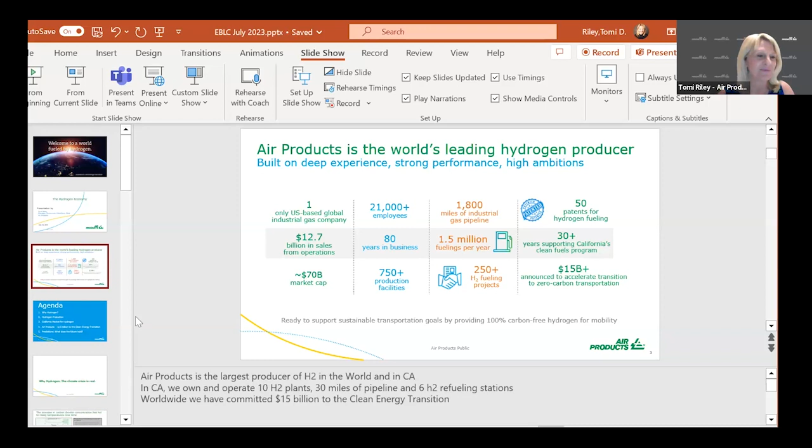So why hydrogen is what I'd like to talk about. I was asked specifically to talk a little bit about hydrogen production. I'll talk about the California market for hydrogen, another quick commercial about Air Products, and then briefly some predictions about the future.

So why hydrogen? Really, the climate crisis is real, and for the purposes of this presentation, we will need to assume that climate change is real. I think most of the folks in this group understand that CO2 concentrations have risen by more than 30% since the Industrial Revolution due to burning of fossil fuels and deforestation. You'll see in these two graphs that carbon dioxide concentrations have significantly increased, and along with that, temperatures.

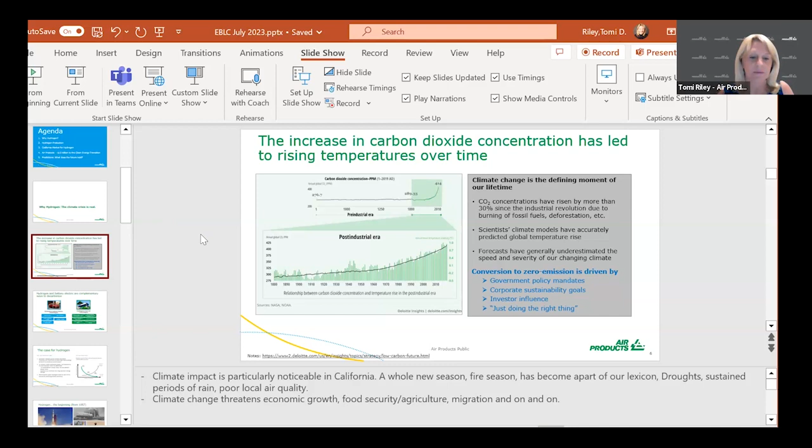And we're feeling that a little painfully right now. California is particularly noticeable for these effects. We have a whole new season. When I was living up in Grass Valley, I was painfully aware of the new season called fire season. It's become part of our lexicon - droughts, periods of rain, local air quality diminished. So climate change really threatens our economic growth, food security, agriculture, migration, and on and on.

Where do we see hydrogen? I want to first put it in context that we believe at Air Products that hydrogen and battery electric are complementary ways to decarbonize. We do see those as the two major energy sources in the future. But when will one be used over another? We believe hydrogen will be preferable when distance, weight, or higher temperatures are needed as an energy source.

We kind of predict that the battery electric will tend to be used for light duty cars, buses on shorter routes perhaps, light and medium duty trucks, light industries, heating and cooling. We see that's where electric will go.

But the piece of the pie that hydrogen will get, again focused on distance, weight, and higher temperatures - those buses on longer routes or more challenging routes, medium and heavy duty trucks. Port equipment is a big opportunity area for hydrogen, heavy industries.

And yes, as Gary mentioned, in the future, a little farther down the road, trains, planes, and ships will potentially be moving on hydrogen. Hydrogen's also a storage opportunity for renewable energy, so when the wind's not blowing and the sun's not shining, you might have backup hydrogen storage to feed the grid. I'll stop and do a quick caveat.

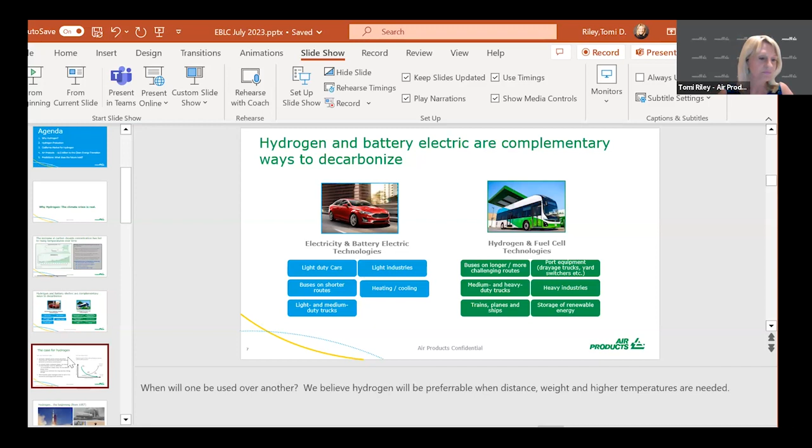The case for hydrogen, that's what we're talking about now. Why hydrogen? Well, industry and research indicates that the world lithium and cobalt resources will not be sufficient to fully electrify.

When you look at all of the sectors that will have to transition during the clean energy transition, if everything went to electric, our power grid would not be able to hold the demand. To achieve 100% renewable, seasonality of wind and solar must be addressed. Wind doesn't always blow, sun doesn't always shine, as I said, and batteries are inefficient for long duration energy storage. So world experts really do agree that hydrogen must be a part of the equation.

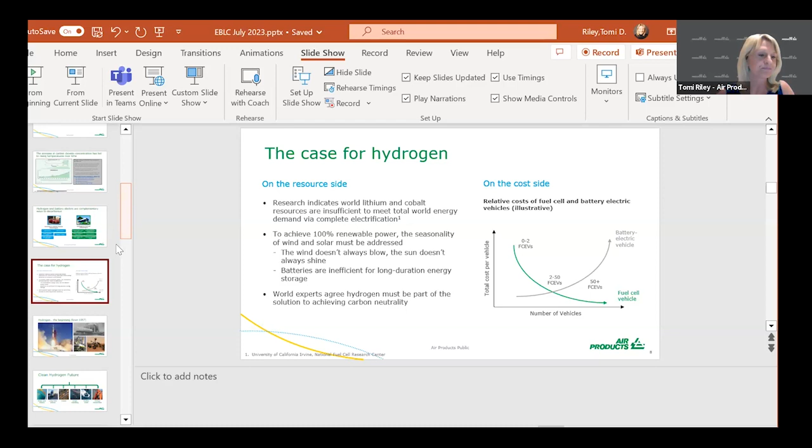So many people might remember the start of hydrogen with the NASA spacecraft. Air Products was providing hydrogen to NASA back then, and we are providing hydrogen to NASA today.

But hydrogen is the smallest element, number 1 on the periodic table. H2 is the lightest element in the atmosphere. And it's a very known quantity in terms of its use for ammonia fertilizer and other industrial works, most notably in California to help desulfurize gasoline.

I mentioned that we have about 10 hydrogen plants. We have 10 hydrogen plants in California. All but 2 of them are on site at refineries. So we work with the refineries to provide hydrogen, and that allows them to do the work to clean up gasoline. That was a big market for us with the cleaner burning gasolines. And so that's when we expanded to 10 hydrogen plants here in California.

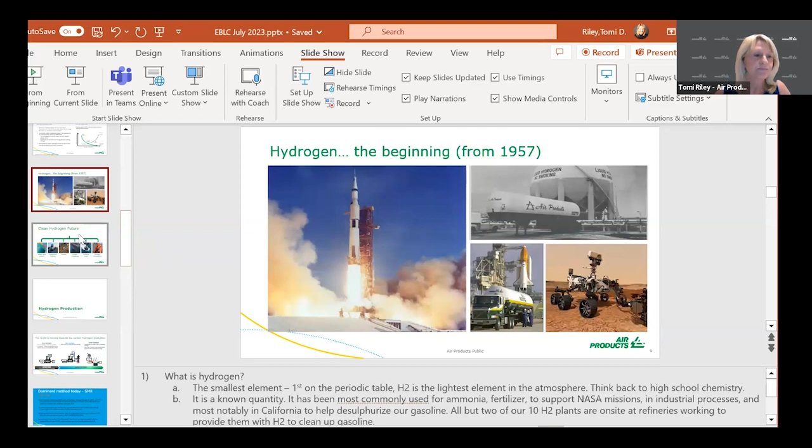Hydrogen future - I think I've kind of touched on this, but we really see a market for ports and port handling equipment. Again, weight comes into play and potentially the amount of uptime they need. Long haul trucks we see as the next segment.

If we're using hydrogen today in light duty cars and in buses, as we'll hear from one of our next speakers, long haul trucks is the next to convert, and that's a big market that we're looking at. Further down the line, we will have trains, ships, and planes, and possibly energy production. You can replace hydrogen with natural gas.

Replace natural gas with hydrogen, sorry. The caveat I will offer here is with ships, there's some folks that believe that a future bunkering fuel will be ammonia versus hydrogen. And for those of you who go back to your high school chemistry, ammonia is NH3, hydrogen's H2. Ammonia is very dense in hydrogen. So there's a guess that ships may be running on ammonia as their zero emissions fuel in the future.

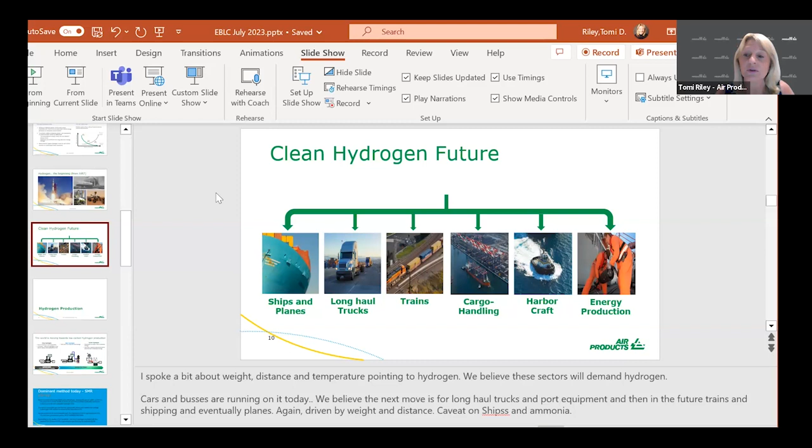Hydrogen production, that's what I was asked to cover this morning. I'm not sure how deep everybody is into hydrogen here, so I'm going to start from the beginning. The world is moving towards lower carbon hydrogen production.

Today you'll find that 95% of the hydrogen produced in the world and in California is steam methane reforming. That's called gray hydrogen. I'm using these colors really just for simplicity. In fact, my company is a little averse to using the colors because we think carbon intensity, real carbon intensity, is probably a better way to look at hydrogen. But for the purposes of today, and the reality is a lot of policymakers who are just still becoming familiar with hydrogen tend to use the color codes as well.

So gray hydrogen, the catch here is that you use natural gas and water to produce hydrogen. So while the fuel that comes out the other end is a zero emissions fuel for use in AC Transit buses or your Toyota Mirai that you may drive, the production process itself is not zero emissions. We use a fossil fuel, natural gas, to produce that hydrogen. So production is not zero emissions. End result, fuel is zero emissions.

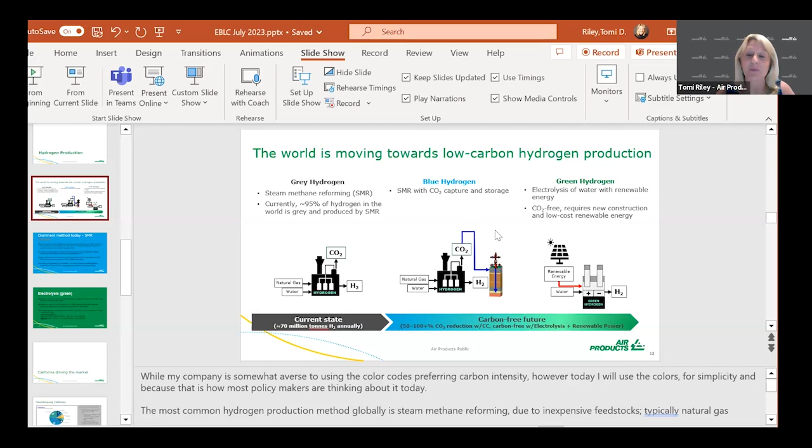So that's electrolysis of water with renewable energy. The renewable energy would be wind, solar, hydropower, whatever we'll classify as renewable to make that green hydrogen. It's CO2 free, but it does require new construction and reliable, most important, reliable, low cost renewable energy. So those are things that we're working on in this evolving market is to get there. So we'll see if we can get there by 2045 to get all the hydrogen produced in the state by 2045. I'm not sure if we will, but we're aiming to do that.

So again, gray is about 95% of what's produced in the world today. It is steam methane reforming, which uses natural gas and uses very high heats, as high as 2000 degrees Fahrenheit, in the presence of steam, and it results in the breakup of the methane molecules to form both carbon monoxide and hydrogen. Carbon monoxide gas can then be repassed over the steam, and we knock out a little bit more hydrogen from the process. So the upside of gray hydrogen is it's producing zero emissions fuel. Those cars running around on the freeway and those AC Transit buses delivering folks to their stop are zero emissions out the tailpipe. But the downside is the byproducts are CO2, and it's not yet carbon neutral.

It takes about 1 ton of hydrogen produced to also produce about 9 to 12 tons of CO2, a greenhouse gas that hopefully, as we move into the future, will be captured and not released into the environment. So the two most prominent forms of production are gray hydrogen today, and in the future, green hydrogen.

Electrolysis consists of using renewable electricity, typically from solar or wind. Hydropower might be an option, to split water into hydrogen and oxygen. It can be produced at a much lower temperature, less than 200 degrees Fahrenheit.

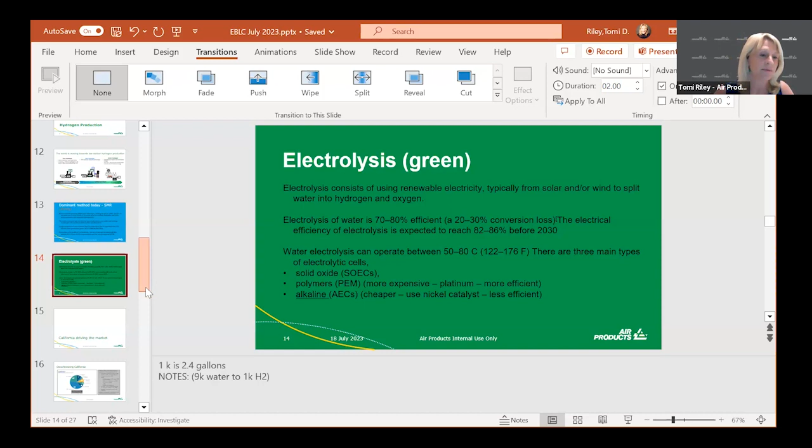So I'm going to move on a little bit to California. Driving the market, Air Products is all in California. And why is that? Let's take a quick step back and look at decarbonizing California. What is it going to take to get to 2045 or 2050 and be a fully green state?

Following that, trains, ships, and planes. Again, our target is transportation and industrial in terms of greening and decarbonizing. Everything else is 11% or less. So those are our two big targets for decarbonizing California.

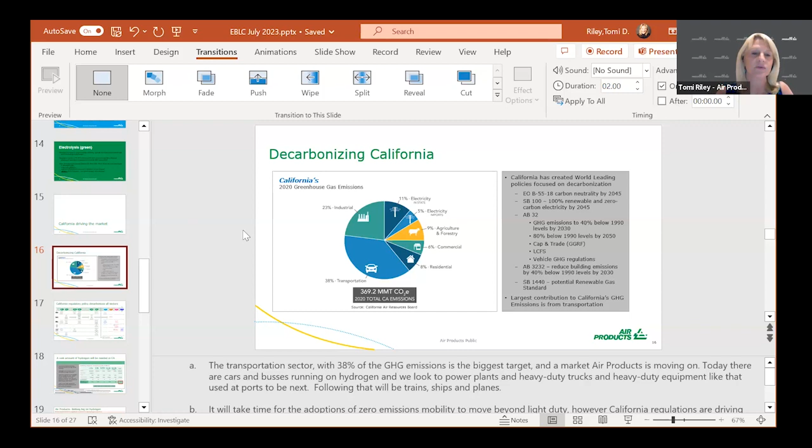As many of us know, the power grid is expected to be 100% zero carbon and renewable electricity by 2045. We'll see if we can get there. And carbon neutrality in the state by 2045. Statewide greenhouse gas emissions reduced by 80% below 1990 levels.

So California is driving this market. Many companies are saying it's too fast, too much, too fast. We're really enjoying the market and finding that it will create a great market for our product.

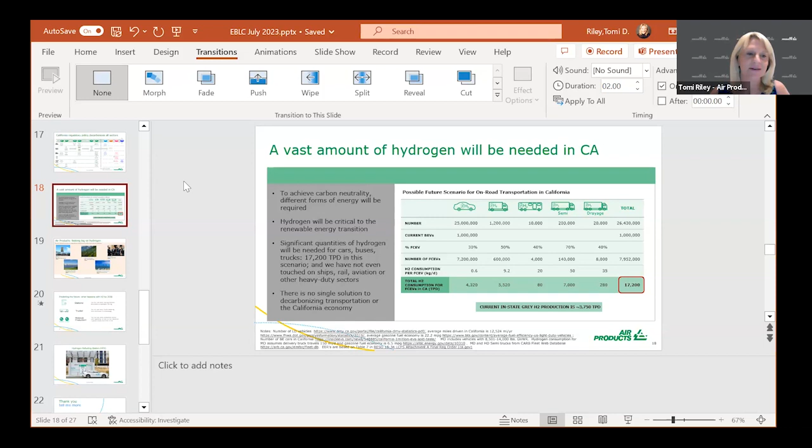So Air Products, the company I work for, is betting big on hydrogen. We've got green hydrogen production planned or underway in Arizona, New York, and Texas. And we're doing major blue hydrogen projects in Alberta, Canada, and Louisiana.

So while we have a long way to go to get to 17,000 tons per day of hydrogen in California, the effort to produce that low carbon hydrogen is underway. This is just what Air Products is doing.

And what's not shown here that I'll add is that we aspire to bring about $2 billion in new projects to California. We are a part of the ARCHES consortium, and if you're not familiar with ARCHES, it's a group that came together to submit a single application to the Department of Energy, who's offering up about $8 billion to incentivize hydrogen hubs across the US.

So we're one of a number of companies that came together to submit through the state of California. It's driven by the Office of the UC President, along with GoBiz in the state, to bring everyone together and submit one application so we weren't competing and dividing up our options in the state.

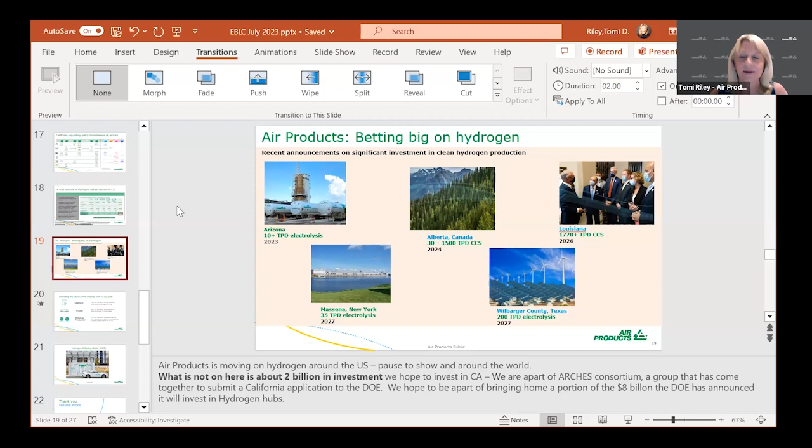We're excited to be part of that process, and again have about $2 billion we hope to spend in California to move the clean energy transition. And I'm wrapping up here, Lindsay.

So what's going to happen? By 2030, what do we expect to see? That's really not that far from now, 7 years.

You'll see a great deal more fueling stations dedicated to hydrogen. We own and operate 6. We have 25 that I know of, either in land development or permitting right now in the state. And that's just us. There's a lot of people out there doing the same thing we are. So you're going to see a whole lot more hydrogen refueling stations popping up.

Trucks, you'll see more fleets adopting zero emissions fuel cell technology. Air Products has a fleet of 2,000, and we are converting. We've put in an order to convert all of our 2,000 trucks to hydrogen. We've got 2 off the floor running around Southern California right now delivering hydrogen. The trucks are not being produced on an assembly line yet, so we're hoping that 2,000 truck order will start to push some of the companies to an assembly line so we can get more trucks out the door.

Running on zero emissions. And again, the molecule, you'll see more hydrogen produced locally and regionally. I'll offer that as we do today, we import a significant percentage of our energy, whether that's natural gas or other fuels. We'll continue to see that in the future. California just doesn't have enough land and water to produce all of the renewable electricity that we need to produce hydrogen.

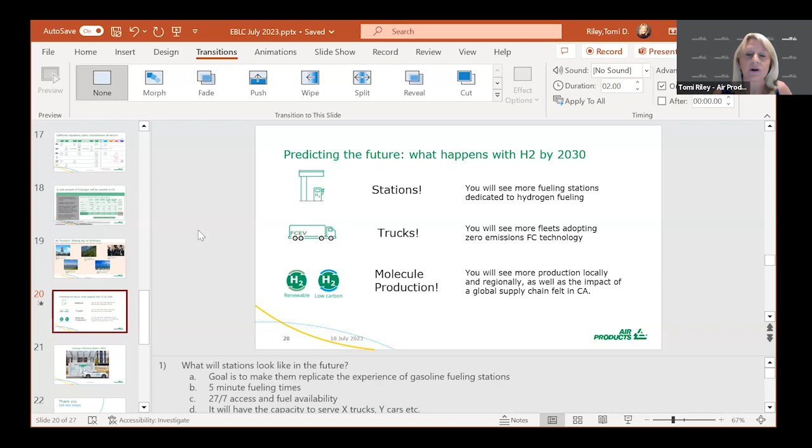And I'll end on that with a view of our hydrogen refueling station.

Lindsay, do you want, or Gary, do you want questions now or after?

Thank you, Tomi, and thank you for that wonderful presentation. I feel like I learned a lot in a short period of time, which is not always an easy goal to achieve. So thank you. I do think we'll do a few questions now, but there were a few that I think everyone might want to chime in on. So I might hold some of the questions until towards the end so that all of our presenters can chime in on them. But some of them were kind of Air Products specific, so I'm going to take a few minutes to ask those, if that's all right with you, Tomi.

Sure. One of them was, does Air Products produce any blue hydrogen today? We are in construction on blue hydrogen projects in Louisiana and Alberta. Startup has not happened yet.

And this is a question that I think might apply to all of our speakers, but I want to ask you, since you're coming from the perspective of a company who's contemplating this. That's the question from Bob Whitley, which is about water. Can the water supply be a lower quality than that for domestic drinking or agricultural demand? And what is the efficiency for conversion of water to hydrogen?

Yeah, they're working on that right now. I think that's a great question. We're excited that our plants, locally in Contra Costa, at Avon and the PBF refinery in Martinez, are close to some of the recycled water agencies. So, yes and no. Is it happening today? No, but I will offer that our gray hydrogen plant located down in Wilmington, California has signed a commitment with the Department of Water and Power in Los Angeles to convert that hydrogen plant to purely using recycled water. So while it's not happening today, I think it's in the near future.

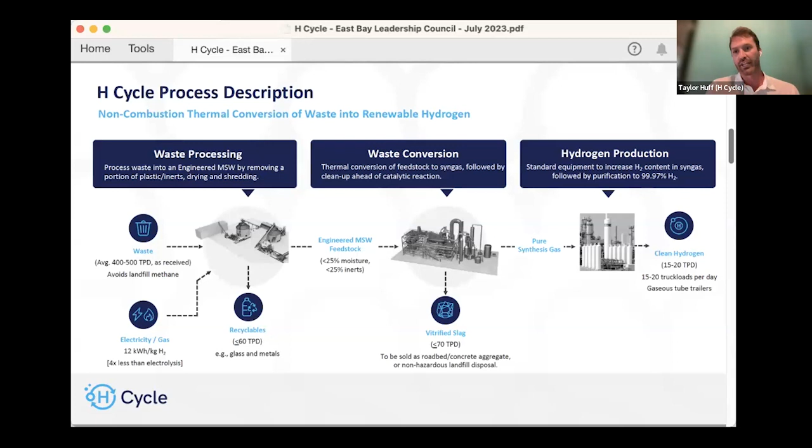It could be sent to landfill for disposal, but we're seeking to get it qualified by Caltrans as a roadbed material, or it could go into some concrete aggregate markets. That could be at least a beneficial, revenue neutral at best, market for this byproduct of ours. The volumes produced are not particularly significant, so even if it does go to landfill, there's still a large amount of waste reduction. It's not organic material, so it would not decompose into methane.

Given that we're operating both in the waste industry and all these different arms of renewable hydrogen, there's a lot of regulatory objectives that we can help address. SB 1383 goals to divert organic waste from landfills, we're very much tied in with that. There's quite a few legacy assembly bills as well that set the table for 1383, really the true first mandates with teeth in the state.

For hydrogen, since it interacts with both the transportation market and the fuel refining market, there's interactions with the low carbon fuel standard. That's an existing program, California once again a leader with the LCFS program now all up and down the West Coast, Oregon, Washington, British Columbia. It's been adopted, other states like New York are looking at it. The low carbon fuel standard provides a clear green premium for our product. For any green hydrogen product, any low carbon hydrogen product, it gives clear monetary value to use renewable hydrogen, whether directly dispensed into vehicles or in a fuel refining process. The low carbon fuel standard is a great boost.

And then much more recent, the Advanced Clean Fleets and the Advanced Clean Truck Rule, mandating heavy duty trucks to go to zero emission, whether that's hydrogen or battery electric. That's quite powerful as well. It's more of a stick approach, but it is forcing fleets, all types of fleets, public and private, to transition. There's various different dates for public, private, drayage trucks, normal fleets, quote unquote, but that's a clear mandate to transition to ZEVs.

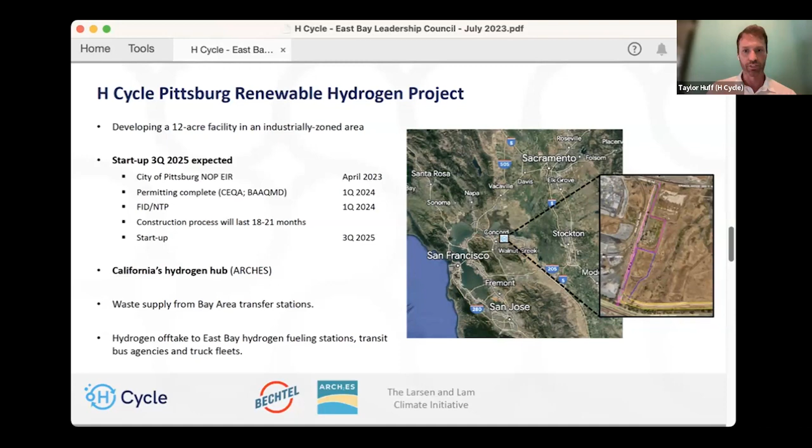And then Bechtel will be our EPC contractor, and we've committed to a project labor agreement for construction. Bechtel is a well-known, experienced construction firm, done a lot of projects in the Bay Area and even in Pittsburg, and we'll be using local Contra Costa Building Trades labor to build these facilities.

So as mentioned, we're a medium scale facility, but these are skilled jobs that could come from refinery or chemical plant workforce. So it's a nice job transition opportunity within the county, and then significantly more construction jobs, as you might imagine.

We'll produce enough fuel for roughly 600 to 800 semi trucks, just to get a perspective, and then not an insignificant amount of CO2 reduction, equivalent to roughly 20% of Pittsburg's greenhouse gas emissions, and that's a quite industrialized city.

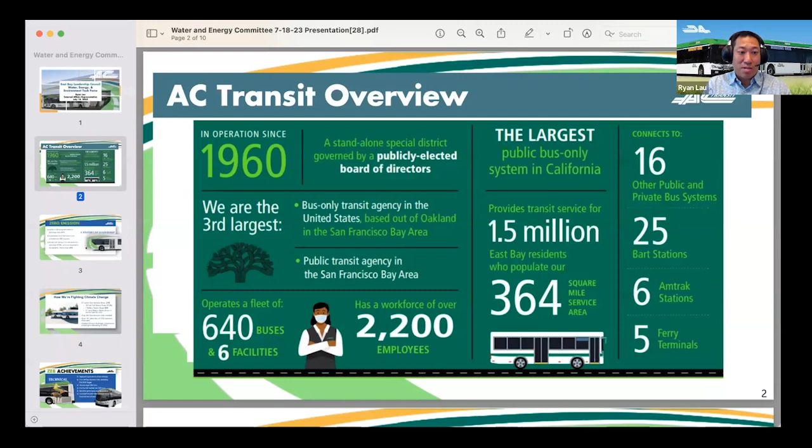We began our zero emission program in the year 2000, and have implemented one of the most comprehensive zero emission programs in the nation. We started off exclusively with fuel cell. It was a time when CARB basically asked all California public transit agencies to either go to an alternative fuel like CNG or LNG, or do a demonstration project. We opted for the more complicated option, which was to move into a new technology when nobody else was doing it. So that's where we ended up.

So we have 37 zero emission buses, 30 of which are fuel cell, 7 are battery electric, and we actually have 21 more battery electrics that I believe we have accepted all of them. But as you may be familiar, PG&E has been a little bit challenging to get transformers delivered and that sort of thing.

So we're waiting on the infrastructure side in order to actually deploy them. In the course of our zero emission program, we've clocked in 6 million zero emission miles, 14,000 metric tons have been diverted. We're actually upgrading our Oakland hydrogen fueling infrastructure. It's a fully funded project, and we're supposed to break ground next year, which would dramatically improve the throughput from 13 buses per fueling window to 70. That's pretty dramatic.